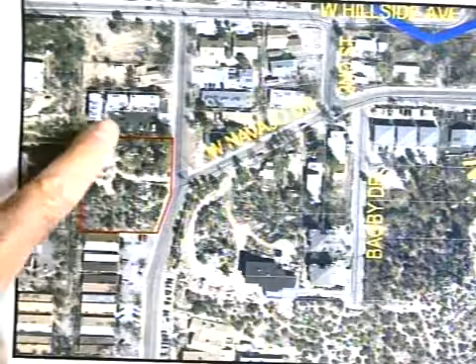Let me give you a better look at the general arrangement of the current site. This is a relatively steep slope leading up to it. You can see the shadow for the driveway cut now, which cuts up through the rocks onto a flat spot on top where the existing house is, also intended to be the primary drive up for the apartment complex. The flat spot on top would be modified somewhat to allow for the larger buildings they're proposing.

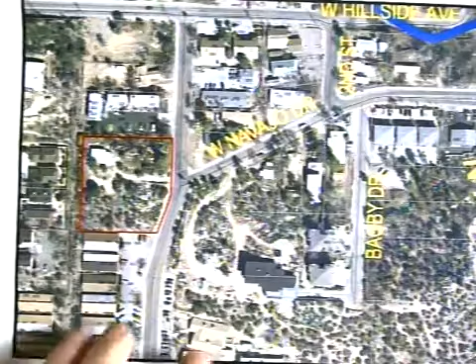I'm going to turn this sideways so it aligns with the aerial photo. They would have to widen the driveway cut to provide a full 24-foot width, which is our minimum requirement for two-way traffic on a driveway. Once they get past that, the area on top is flat enough that they can simply grade it to provide sufficient parking for the 21 units.

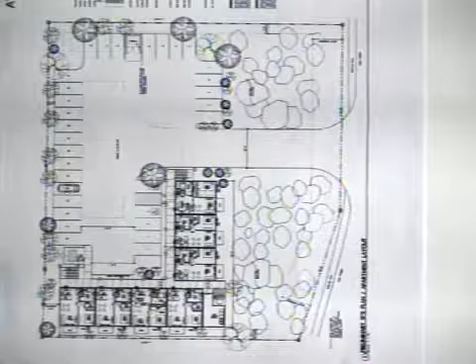They're talking specifically about a building on the south end of the property. That area is the least conducive to producing parking and the easiest to put a building on. It would be a 3-story building, a total of 21 units, 7 units on each floor. The proposal is for relatively small units, most of them 1-bedroom. That's a trend we're seeing with some more recent apartment complexes, as smaller units seem to be in demand either for students or for single persons looking for rental housing.

We've gone through the review from the staff perspective. Building, fire, engineering services, and planning have all reviewed the plan. It meets all of our requirements except one, the rear setback requirement. Due to the topography of the lot, they qualified for what we call a topographic exception that lets them reduce the rear yard setback from 20 feet to 10, which is what he's indicating on his plan. This side is considered the rear because of the street access coming from the other side. So he has met all of our requirements with the topo exception for the rear setback, including the size of the building, the minimum lots, access to and from, and the number of parking spaces.

This is one of the site plan approval processes established to go through the water resource process to obtain a water allocation. So this site plan is in anticipation of a water service agreement going to council. At some point in the relative near future, after that has happened, they would submit a full set of building plans, and a very thorough review occurs at that time. If you have any questions, I will attempt to answer them.

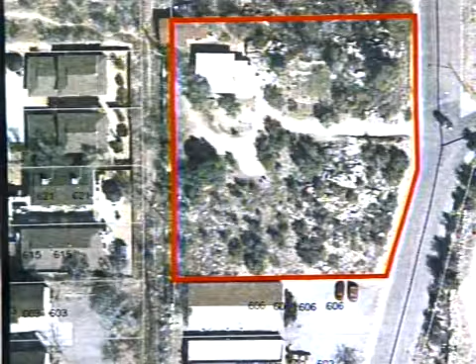The adjacent properties on the other side have fences along the back, but they're not actually at the property line. So this distance looks considerably wider than the typical 20-foot alley because their fences are inset almost 10 more feet, again because of the slope of the hill at that point.

That probably helps with the setback exemption. Also there's a differential in height, so there's not a direct impingement or a building very close to an adjacent property. Thank you.

These will all have to be sprinkled, won't they, anyway? Yes, apartments, yeah. I don't know, it seems like a pretty straightforward project. Fits in there pretty good.

I'm kind of surprised that 3-story walk-ups wouldn't have an elevator, just from a marketing standpoint. That seems strange.

Is the owner or architect here to speak about it? No? No, again, I believe the representative is ill this morning.

It mentions in there that a TIA is required.

Would council approve or not approve this plan subject to that? We don't get a chance to take a look at the TIA. It's a staff review process, so they will have to submit and get their traffic impact analysis approved by our traffic engineer before building permits will be issued. So it's purely at a staff level. No, the traffic impact analysis will not go to council.

When you drive up that area there, it's kind of a complicated intersection, and they're going to take their access. That is the reason for the TIA. Normally on a site this size, in a location like this, they wouldn't require it, but because of that intersection, our traffic engineer wants to verify this is going to work. But it specifically says it's required.

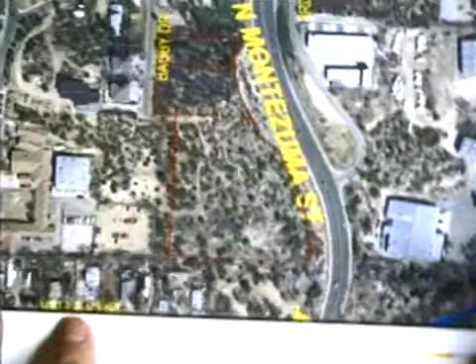So where's the rest of it? Okay, so there's the rest of it. Well, I didn't have that drawing in my packet.

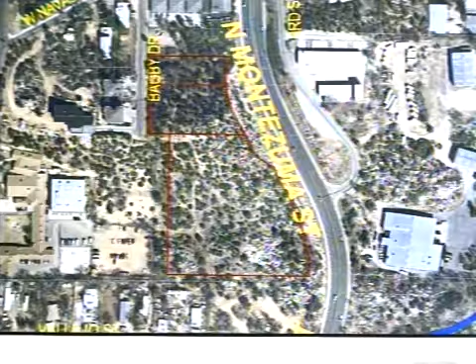So this property will require a combination of lots together in order to make the site. Right now there are 3, possibly 4. There's a long lot right here, which I believe is part of this project as well. The proposal is for a 101-unit apartment complex.

Or is it changed to 102? It says 102, yes sir. It originally came through our PAC review as 101. This project actually came in and started some time ago.

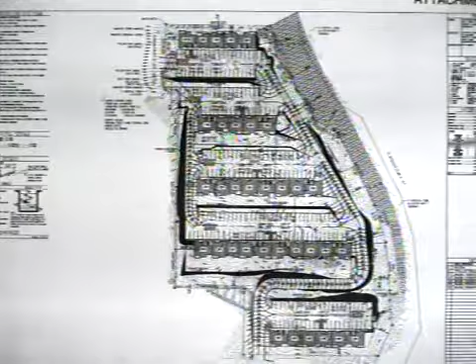About a year and a half ago, the city council was revising its water policy, and they created a list of units that were in process or projects that were in process, and they put those aside and said that they would be subject to a review for water regardless of what they were. The water policy subsequently changed, and some types of developments wouldn't have the higher priority that council assigns. In this case, this was one of those things that made that prior list, so it's a carryover.

And the city council... Was that from an old plat? Because we've never seen this. No, it never actually made it to this point in process. This was before council's water policy changed to require site plan approval.

So the request is for a 102-unit apartment complex. The buildings you see, the footprints you see, are 3-story buildings also. These are significantly larger overall. The mix of units, which we specified in your staff report, is significantly broader. This is more of a market rate project, intended to capture a fairly significant market share of people looking for rental housing rather than ownership housing.

The applicants are here and can answer specific questions, but they've also provided us with kind of an unusual 3-dimensional fly-through of the property, and if you'll indulge me a moment, I will run that for you.

Well Joe, this is one of your favorite things, comments. A project that's topographically challenged like this, and we don't get a site section. It would have been much clearer. I still don't know, because we've kind of requested staff on these kinds of projects to ask for a site section. We're not having too much luck doing that.

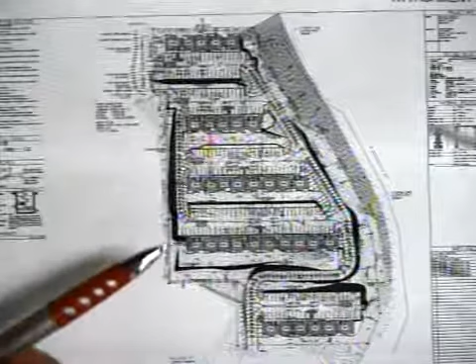Then why is there a detention reservoir on the right side? That's the drainage path on that site. There's going to be detention tanks underneath the parking lots, and then the overflow will dump into that ditch on the west side, and then come down the property.

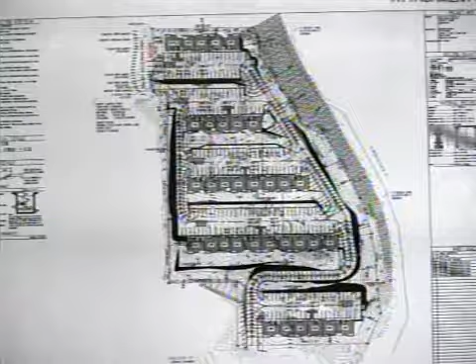Is the area facing Montezuma, once you get past the stone fill, not disturbed? Well, parts of it are disturbed, yeah, because we had to create the driveway, but the tall stone is undisturbed.

So about how far back from the property line on the east side does it start? It varies, but it's about 25 to 40 feet off the top of the bank, something like that. It varies going up. Well, that'll help the appearance of Montezuma, there'll be a step there, it's not just built straight up to the property line.

Are you planning a guardrail on that? Yes, I think that would be wise. You've got a 50-foot drop, don't you? In some places, yes.

Because when I go up Montezuma at that spot, I'm not looking up at cars coming at me from the sky. I'm going to miss it. It's a rock face, yeah.

Well, is it going to help? Can we request a site plan section? Yeah, and come back and see us? I think the section will help, I think we need it, Tom.

We have a video, we haven't shown the video yet, so he might want us to see it too. Okay, so I can run that for you, but if you have a request for additional information, we can do that, that's your prerogative. I think we're getting there, that'd be great.